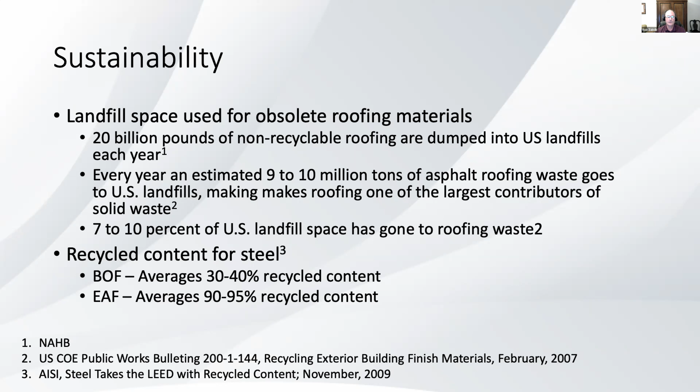Go ahead and hit up on the next slide, Mark, and we'll talk a little bit about what that means. Like a lot of other industries, we as a metal roofing industry have done a lot of work with LCA here lately in the last 10 years, producing EPDs. A lot of folks are using those, downloading them. It's one of our more popular downloads, and a lot of folks are using those for their projects, their LEED projects or whatever program they're operating under.

What you got to remember about these things is that when you download an EPD and get that data, it's broken down into different impact categories. There'll be global warming potential, ozone depletion potential, acidification potential, eutrophication potential, smog formation potential, and then what they call abiotic depletion, which is depletion of non-renewable resources that focuses mostly on fossil fuels in construction.

But these are really very data-driven approaches, and they're dictated by ISO standards. And there are differing functional units. When you download the EPDs, like for instance our EPDs on our website, also hosted on UL's website, they focus in on 100 square meters of cladding material. That's about 1,080 square feet if my metric conversion in my head is working correctly. And you have to resolve those functional units between different materials.

And then those EPDs, even though there are documents called PCRs, or product category rules, that kind of drive the scope of the EPDs -- those PCRs are very well coordinated within materials, but not necessarily well coordinated across materials. So you have to go and look at the scopes and address the differences in scopes. And of course, with all the impact categories I mentioned, a lot of people tend to focus on global warming potential, for instance, which is your carbon release. But putting all your attention on that takes away from other things, and you might be paying a greater penalty. So how do you weight those? These are really things that are outside the scope.

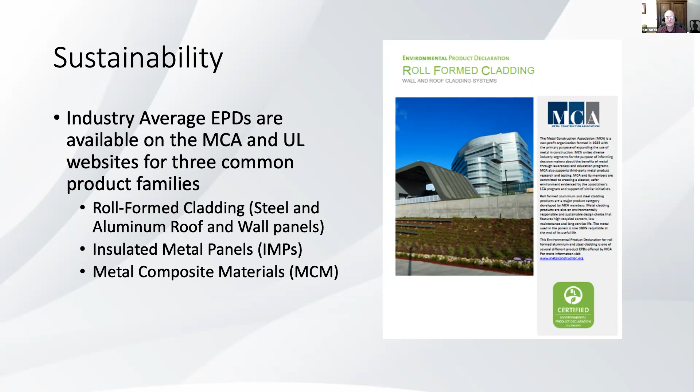Thanks, Bob. I think a lot of building owners are really interested in exploring rooftop solar systems for their buildings. But like most things, a lot of it comes down to budget and cost. So Mark, can you talk to us a little bit about the life cycle cost of such a system?

Sure, thanks, Leanne. The first wave of solar in the 70s was really all about the environment, with the culture of the California hippie being disconnected from the grid. It has really become different over the last couple decades. It's on the rise again, and now a lot of it is about the cost and how much value you get out of it—it's become a worthwhile investment. We've been talking about the longevity of the service life of a roof and the value of that, so when you couple a solar asset with a roof asset and look at it as one asset, you can really see the advantages of a metal roof.

If we look at the cost stack up, yes, a metal roof is more expensive than other types of roofs like shingle roofs or single ply membrane roofs. But once you put the solar in, solar is a little less expensive on metal roofs, especially standing seam metal roofs—there's just less material, less labor involved. So when you look at your total system, you're really ahead of the game with metal, lower cost with metal roofs. Arguably, every project is different, so you may be at least even, but the benefit is you now have a metal roof on your building—that's really where the cost comes in.

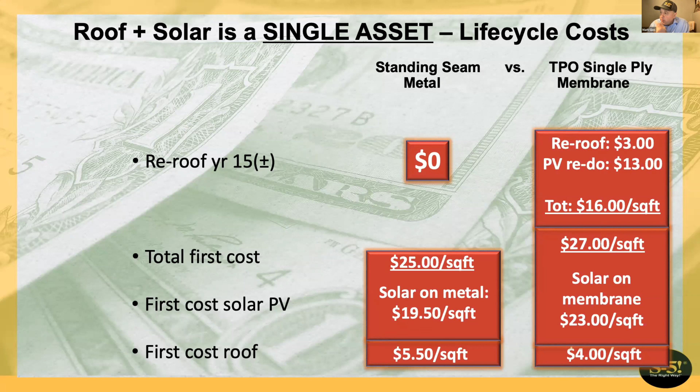So here's really the cost comparison of an all single asset. Now, what happens if these other roofs don't have the service life as long as the metal roof? You may end up having to pull out and replace the roof in the midst of the life of the solar system. If you put that cost into it, it becomes a no-brainer—it really shows the total cost. This is in roofers' terms, metal in construction terms, per square foot. People in the solar industry think of things as dollar per watt of what they install, but this shows you're way ahead of the game if you look at the life cycle cost and look at this as a single system, a single asset.

And another way people look at this is with what I would call—Mark, before you move on, can you dive in a little more on better describing why the total first cost as it relates to solar on metal is cheaper than when looking at other roof types?

Generally on a metal roof, you'll see a flush system, so there's less material, especially if you don't use rails, because metal roofs really don't need rails. Specifically on standing seam roofs, you're not penetrating the roof at all. It's very easy to grab hold of the roof at the seam and install the solar modules onto it. So that labor savings, less material, and fewer rails all add up to a lower installation cost overall.

For audience members hearing terms like rail and the various components, we actually have some slides later to show what that is, so hang on with us.

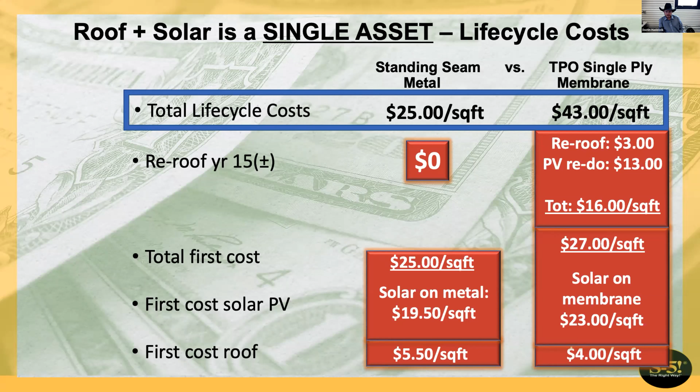The other part of it is installing jacks that need to be flashed and waterproofed, which takes a tremendous amount of time, energy, and labor. For other types of roofs, you're flashing and penetrating that roof, but with a standing seam roof, there are no penetrations.

To put a point on the replacement cost, it's very common to look at the value of a solar system in terms of cash flow analysis. The line on the left side is your initial cost, the blue horizontal line is your yearly savings, which adds up along the orange line. This system, as an example, has about a 6-year payback.

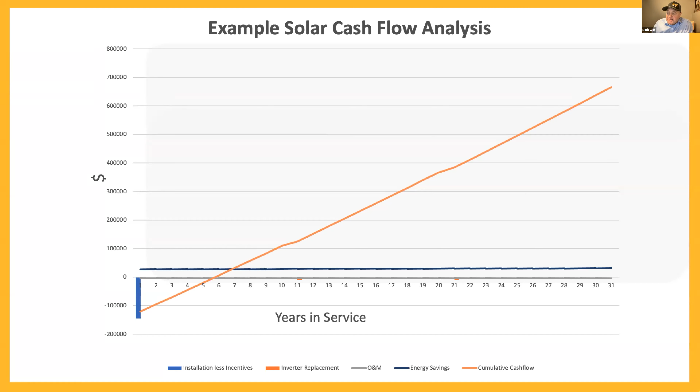The rest is your net positive cash over a 30-year period, the life of the system. It's common to measure these things with net present value, or IRR, the internal rate of return. In this example, you're investing $145,000 and your net present value of all that cash is $276,000, with an IRR of about 21%, which is a great return on your money.

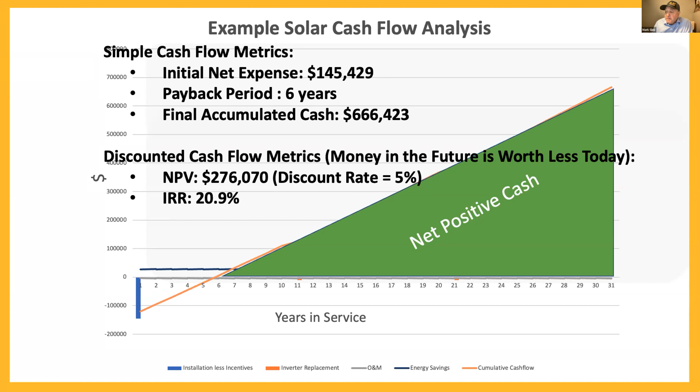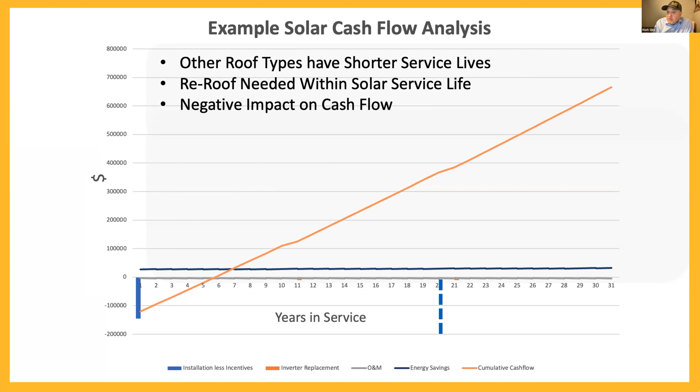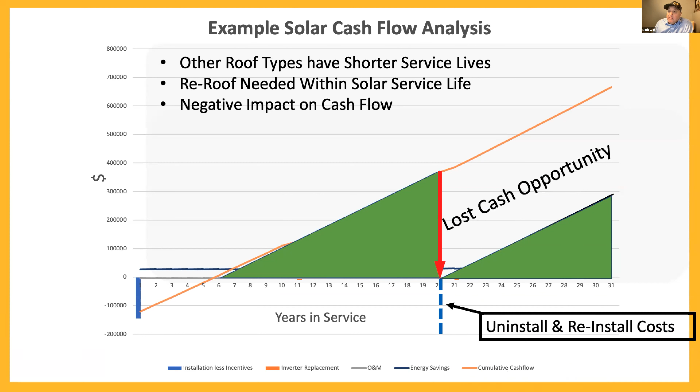So that's really all I have on that ROI, but you can really see how valuable it is to put solar on a metal roof.

Thanks, Mark. Now we're going to move on and review some basics about metal roofs and solar panels. Bob, can you touch upon the different types of metal roofs over which a PV system could be installed?

Absolutely, Leanne. Before I do, I'm going to make a follow-up comment to Mark's cash flow analysis. This is not magic — it's the same kind of analysis you do on any project, construction, financial investments, it's all the same rules. What's always interested me about the sustainability aspect too is that it's not really very different: your initial investment or initial impacts from an EPD, but it's the use phase that drives your actual performance, which is why it's important not to stop at EPDs. Look to drive this all the way across to a cradle-to-grave situation with a project-specific LCA — it's much the same concept.

Going back to the roof options, Mark and Dustin have both mentioned these systems already. They fall into two general groups. On the bottom left is the exposed fastened metal roof, also called a through-fastened roof or panel roof. This particular example is installed over open framing or Z purlins. In the middle is a section showing one of those side lap details, with a lap fastener and tape sealer, which is significant for diaphragm action and of course leak resistance.

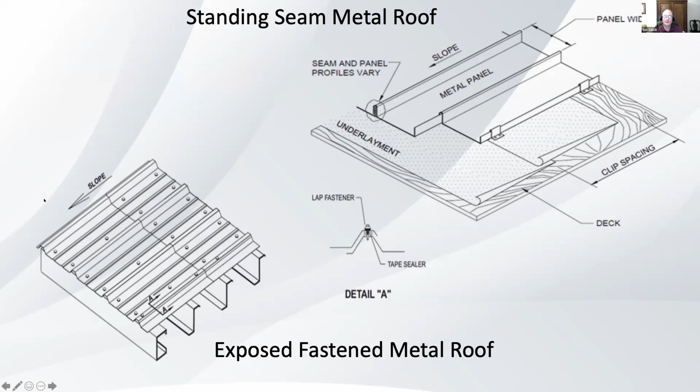I'd like to dive into the next slides on solar on metal roofs, so we can see this coming into play. I think a couple of folks have asked about it. So here's your eye candy.

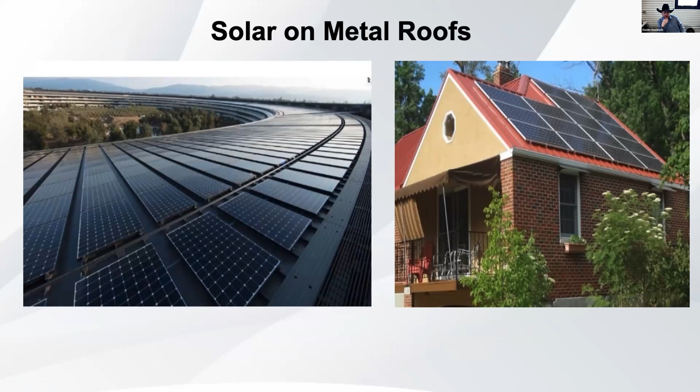Mark, you're going to talk about this. What you're looking at to the left is Apple's World Headquarters building. Every module there is fixed - that's what we call the direct attachment method. This is interesting because you see the space gaps between modules mounted in portrait, typically you'd see them in landscape on a standing seam. But there you're seeing a flush mounted system - both of those are flush mounted systems.

This is just an overview of the two basic extremes. One, as Dustin said, is Apple headquarters - a 17 megawatt, huge system. And on the right is a typical residential installation, probably 5 to 10 kilowatts, a pretty small system.

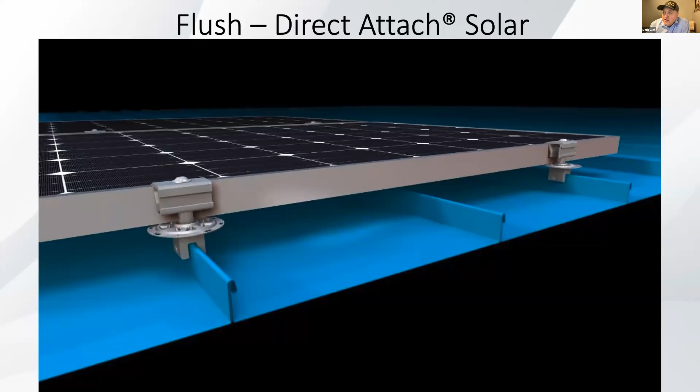Without rails that have to be pre-measured and laid in exactly ahead of time, most of this stuff goes on the fly, and the module itself is the jig as you build. So the concept is it's just less work because there's less logistics involved, since there's no rails involved. And we could talk more about that.

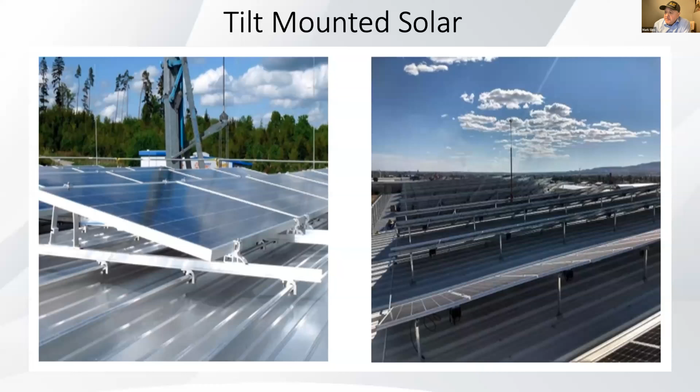Then the third basic type is a tilted system, and there are tilted systems on metal roofs, as you can see. The attachment to the roof is basically the similar attachment, then there's a mounting system on top of that, and that's tilted. Now with a tilted system, you have to have a space in between these rows, as you can see, because of shading. So the trend has definitely been going towards a flush system. Those are much more common these days.

And it's because solar panel costs have gone down, so it's better to have more panels. People tend to want to have more panels on the roof, even though they're giving out less energy in a given year—that's generally what people want now. So they'd rather go with a flush system or very low slope, so there's not that much of a gap, and you can just put more solar panels on your roof.

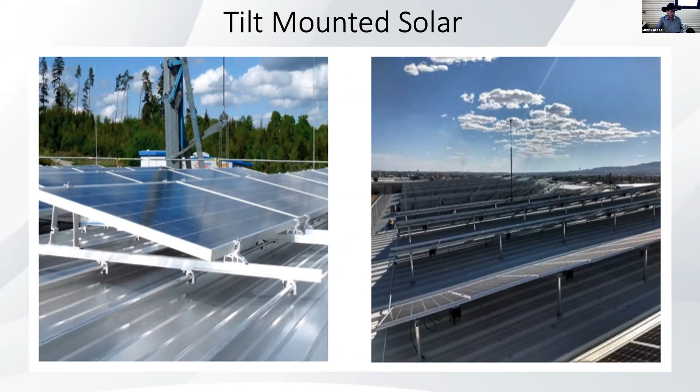Kind of to discuss that a little more, in the 70s and 80s and even early 90s, the cost of solar panels was a lot different than it is today. Making a module as efficient as possible was kind of a priority because of how expensive the modules were.

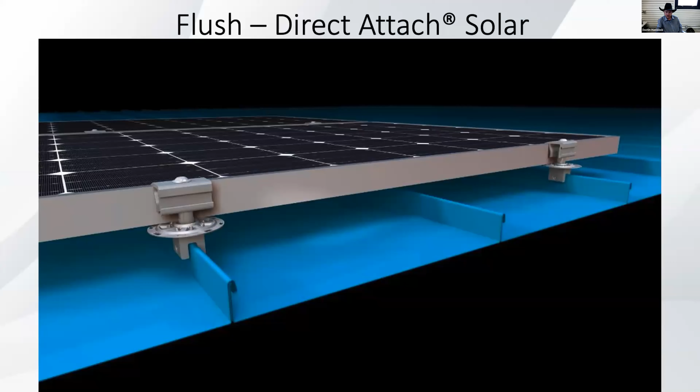When you're looking at a tilt mounted system, it's a good idea to compare—look at that system as a tilt mount system and the production that you would get. Also look at the space loss and the expenditures of the added hardware to tilt it up, and then compare that to a flush mounted system by adding more modules, using the space on the roof as much as possible before making decisions on tilted systems.

The cost of a tilted system is generally more than a flush mount because there's just more material, more work involved, so that goes into play too. But basically, people are willing to give up a little bit of energy on an individual module to get more total energy by putting more together in a flush mount system.

So that ties in with what is required to put a system on a roof. Okay, and we're going to move on. At this point, we're talking more about the technical factors of mounting the PV systems on metal roofs.

And we have to keep in mind the PV system mounting—that's only about 5% of the total system cost, but it's such a critical factor when it comes to performance. So Bob, can you talk to us a little bit about that?

Sure. I'm laughing because one of the messages just came across the screen about tilt systems and the wind loads involved, by a gentleman named Keith, and I'm looking for the camera in my room because he apparently has figured out what my next slides are. So congratulations, Keith. Let me know when you head to Vegas.

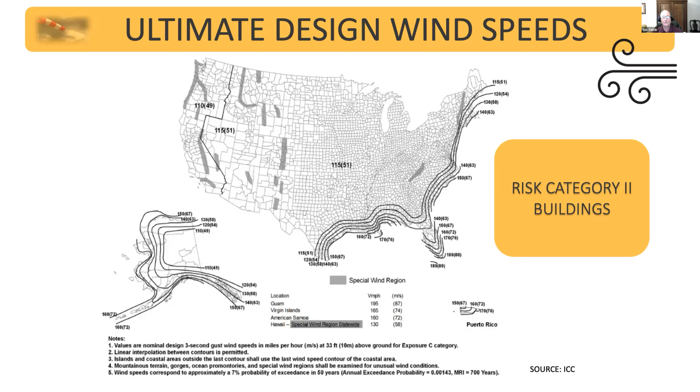This is where you get into your roof design, and there's a series of calculations that produce the sample results you see, within this chapter. I'm not talking about PV systems yet, this is just the roof. We'll bring the PV systems in here in a second, but this is a hot zone map, if you will - they call it the wind zone map, but I like to call it the hot zone.

There are two tables - these photos come from the less than 7 degrees table. There's another table for higher, steeper slopes. But then you run through these calculations and those give you your numbers. Okay, that makes sense.

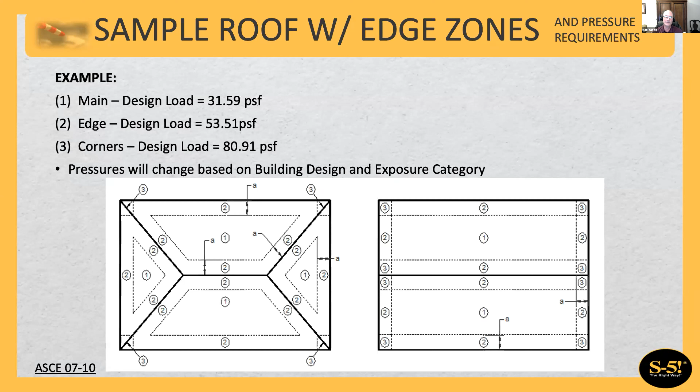What about the effects of the PV system? That's the next slide, and I think this is what Keith was driving at. So first off, ASCE 7 breaks these systems into two groups, very much along the lines of what we've been talking about.

There are provisions for rack mounted PV systems on low slope roofs - that's what you're looking at right now. I think that's section 29.4.3. And then there's also provisions for flush mounted systems on steep slope roofs. Those are in 29.4.4.

This picture is from the low slope provisions, but the flush mounted kind of ties into this as well. There are no unique drawings when you read it, but this will illustrate some points I'm trying to make about inherent things regarding these corner zones within this map.

So the PV module itself can experience greater than average wind load due to, number one, its location on the roof. We saw that with the wind zone maps, and that's repeated here—that's what that top left diagram is showing you.

But they can also experience greater wind loads when they're at the edge of the array—that's what's on the far right solar panel plan. Those shaded areas get a boost in load. In between, at the top, there's a building elevation showing how tilt and distance, the offset from the roof, affect wind loads and how they're applied. All this ties into the two charts on the bottom left-hand side.

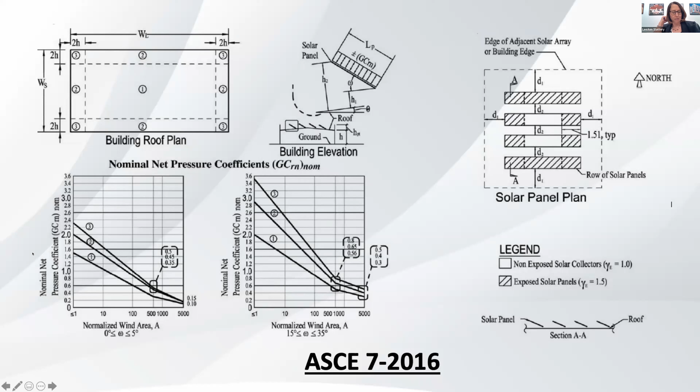Thanks, Bob. Now that we've covered the roof conditions, let's move on to the topic of equipment performance and testing, the product testing of the individual product. Dustin, is that something you can comment on?

Dustin? There you go—oh, you're muted. It's muted, sorry about that.

I'll try to be as brief as I can so we leave plenty of time for questions at the end. What's really important is making sure that the product selected for the application has been adequately tested for the kind of loads it's going to see or weather conditions it's going to see, and that it's metallurgically compatible with the roof itself.

Here you're looking at some submergence tests. The industry tends to look at wind-driven rain. Some manufacturers will take it to the next level and run the ASTM E2140 test, which is 6 inches of static water pressure over any component that might penetrate into the roof. To the right, you're looking at pull tests where clamps are pulled specifically on the roof they're intended to be used on. You can jump to the next slide.

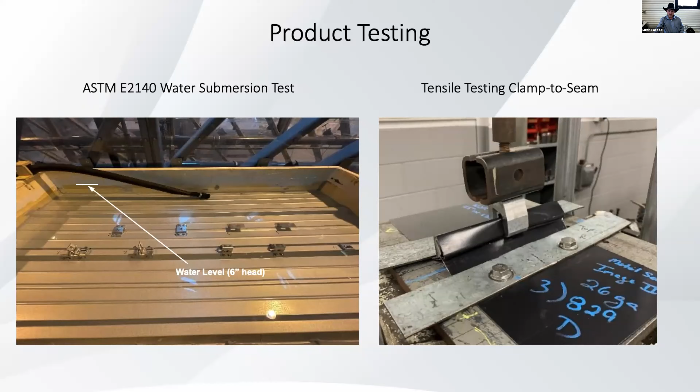And then metallurgical compatibility - these are just a couple of things one should be looking at when selecting a system to marry the modules, the PV system, to the roof. This is a 2,000-hour salt fog test illustrating a product that will essentially outlast the coating on the roof. Here you see the coating is completely annihilated, but the fastening system is still there and in good shape metallurgically.

I saw a question come in from Mustafa asking about 2703 and grounding and bonding. UL 2703 is a UL standard that tests everything from the rack up, and grounding and bonding is one of those things within that test standard, which is module specific. 2703 has fire rating performance, mounting mechanical load, and grounding and bonding, all within that standard. Grounding and bonding means maintaining that anything likely to be energized has a ground path, a path to ground, to prevent somebody getting shocked accidentally by touching a piece of metal they didn't realize was energized. It's important when looking at your racking system to make sure it has been tested to these standards as well.

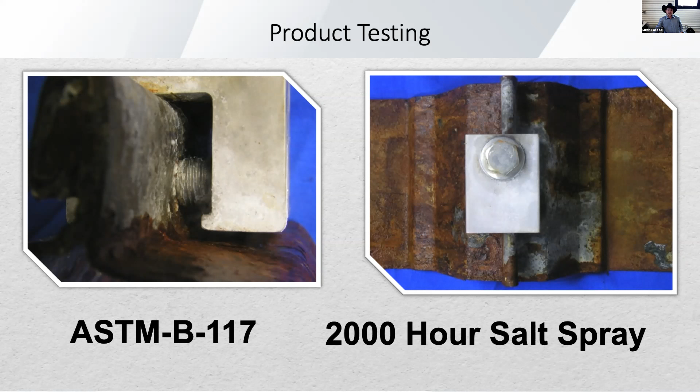Good point. So Leanne, I'll just dive right into the checklist part of it. We already talked about the importance of site condition, knowing your site conditions, as Bob talked about. The importance of understanding that site, getting professional engineers to look at the site, make sure you calculate the right forces that are going to be on it that you need to resist. We know the importance of having the right product, having that engineered, having that tested.

It's also important, the company that you're buying it from. What's its track record? What are people's testimonials, their conclusions of doing business with that company you're buying a mounting system from to put on a metal roof? That's as important. And beyond how good a company is to deal with, customer support also matters - how do they manufacture, whether they contract it out or manufacture in-house? Do they have an ISO 9001 listed manufacturing plant?

Do they produce with quality standards that guarantee that each product shipped is going to be to that spec, that product with the right material? Do they certify that by an independent auditor?

So if you put all those together, this is what we did at the end of this third paper for MCA. We put all those thoughts together into a checklist to use, whether informally or formally, to go through and say these are the things that are important, have I done this, and who's the responsible party?

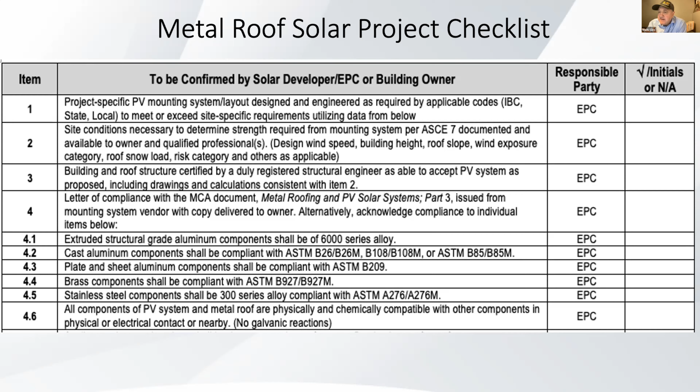It really gets into the project, site conditions, the building itself, then the materials used - are you using the right type of aluminum, are the aluminum parts per the correct specs? I'm not going to get into the details, but it also gets into the sealants and other important conditions we haven't reviewed. Then it gets into the manufacturing aspect, what I was talking about. It's a really comprehensive list covering everything that's important when you create this system and put it on your metal roof.

The point of this, at the end of this third paper, was just to collect all the thoughts we talked about. So that's kind of how I'll end this part of it now, unless Leanne, you have anything to add.

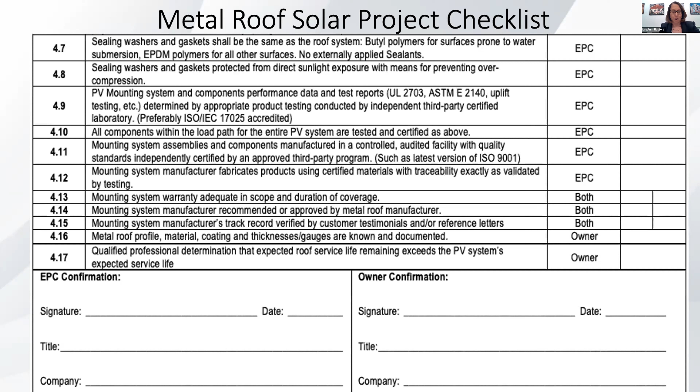In wrapping things up, I just want to reiterate what Mark said. This particular checklist can be found on page 3 of the part 3 white paper, mounting system and installation.